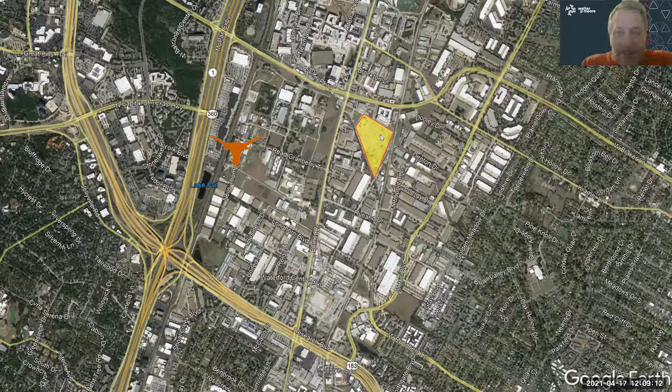So, kind of north part of Austin. If you're familiar with the Domain, it's kind of catty corner across the intersection there. There's a little tire shop on the corner where I got new tires a few years ago. So it's a kind of a strange place for a stadium, but an up and coming part of Austin here to develop.

So a little bit about the project team. Our client was Gensler. They were the architects for the project, both out of their Los Angeles office and their Austin office. We'll talk about why that is in just a minute. CAA Icon was the owner's representative. Ourselves, along with Ruben Martinez and the good folks over at Martinez Engineering, were the structural engineers. CBD and Garza were civil engineers, and then you've got all the non-civil engineers. I will say, for the students out there, get used to working with other engineers. I would say, even though clients are mostly architects for us, I spend probably more than 50% of my time working with other engineers. So kind of learning how to work with each other starting from school is a great trait and very valuable trait.

So, okay, a little bit about MLS stadiums in general. We work on a lot of stadiums, everything up to MLB and NFL stadiums. MLS is a little different. Obviously, it's kind of an up and coming league, and tend to be about in the 20 to 30,000 seat range, depending on the market.

But they tend to also be very austere buildings. The economics of these clubs is a lot different than a major league club or an NFL club that's got big TV contracts. So the budgets for these projects tend to be in the range of 100 to 350 million. Q2 Stadium is around 250. Won't say the exact number, but it's in that range. Whereas MLB, we just did Globe Life Field for the Rangers, that was about $1 billion, and NFL all the way up SoFi Stadium is north of $3 billion. So it's a little bit different mindset when you're designing for an MLS stadium.

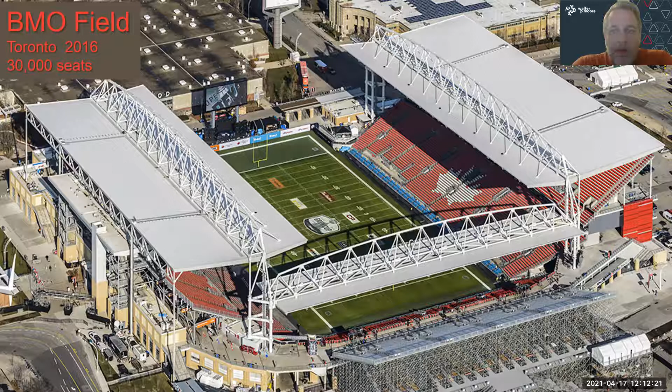Another project, this is up in Toronto. This is BMO Field. This was an existing stadium that was expanded to house the MLS club up there. We actually worked on this one for the steel contractor and doing erection engineering for the roof here. So we worked out all the crane lifts and shoring and those kinds of things to erect this roof. So they put a new covering on it and expanded the seats to accommodate this existing stadium.

Orlando City Soccer Stadium, I guess it's called Exploria Stadium now, opened in 2017, about 25,000 seats. Got a pretty decent canopy to it, but the seating is pretty straightforward, not a lot of suites or anything like that.

And with Allianz Field in St. Paul, so this is for the Minnesota United Football Club, opened in 2019, about 20,000 seats. And you start to see a little more high design come into this one. This actually has a tensile membrane skin that we helped develop the material for, that you kind of see it glowing there, wrapping the building. Shot during the daytime. These are starting to look a little bit more now like a smaller version of an NFL stadium, and they certainly spent more money on this than the prior ones that we showed you.

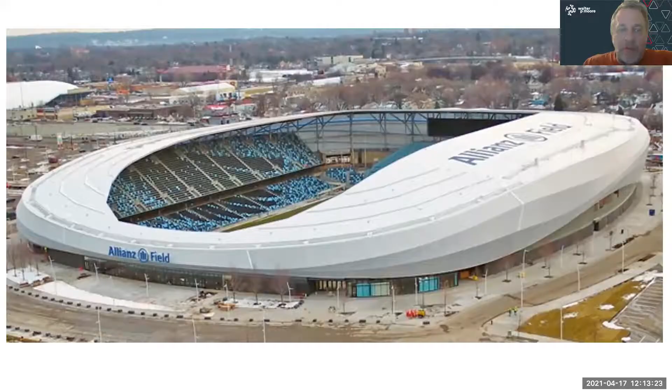Just a little bit on the section here. And you can see the material that wraps the skin there. It's a laminated PTFE mesh. So a little more high design element coming into it now.

And then this is where the Austin FC debut match later this afternoon is going to happen. This is Banc of California Stadium in Los Angeles. It's on the campus at USC. You can see downtown LA there in the background. Our office in LA is that building right there in the middle. And this was going on at the same time we were working on SoFi Stadium, kind of down the street towards LAX from this. But again, it's a little more developed now.

This has an ETFE skin around it, a fairly large ETFE roof, pretty substantial canopy.

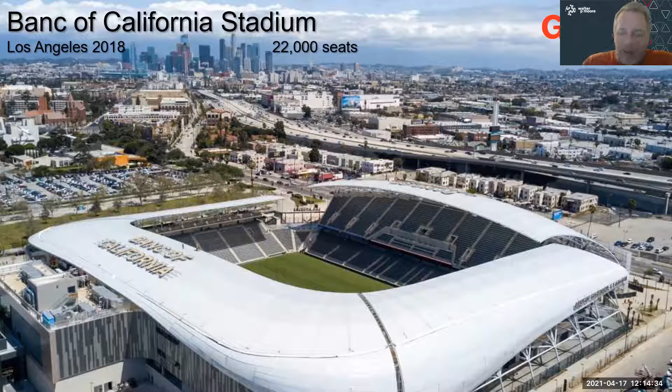We're starting to look more and more like European soccer stadiums in the design. The sports architect team over at Gensler in LA were responsible for this design, and a lot of those same folks came and worked on the Austin FC Stadium with us. So there were a lot of reference points to Banc of California Stadium, about 22,000 seats. And then this is actually a future one we're working on now.

So just a little bit there about MLS in general and how that market looks, and I'll get into Q2 Stadium more specifically now. This is an overlay on a soccer pitch of different canopy coverages for some of the projects I just showed you.

This was a huge deal for ownership here. We know in Austin, especially during the MLS season, you're playing during some of the hot months. Fan comfort was a big driver in the design of Q2 Stadium and led us to a very large canopy, the largest in MLS, and that's obviously to get shade for the fans.

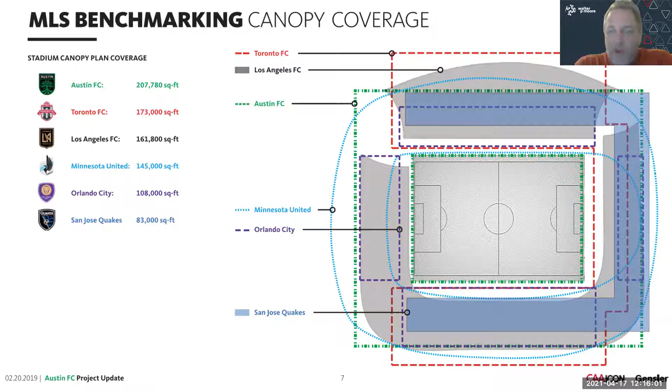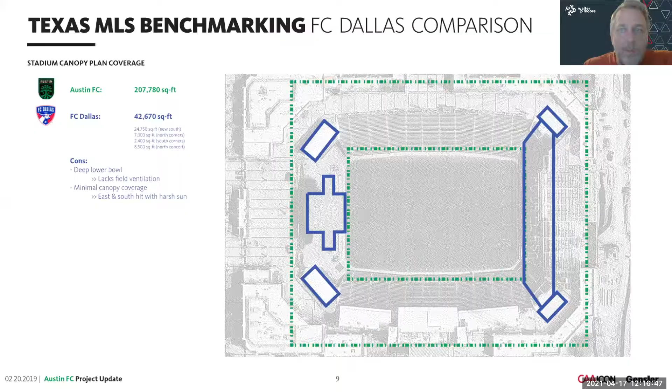Really that idea about the fan experience came from what we know about the experience up in Dallas with FC Dallas. They've got some covered seats, but by all reports, and maybe some of you have been to MLS matches up there, it's a pretty hot, sweltering experience to sit outside, especially for a day game at FC Dallas. That was something our owner was very aware of and wanted to make sure the design of Q2 Stadium considered fan comfort as the paramount consideration in coming up with the roof coverage. So you see FC Dallas, a pretty exposed condition.

This is actually an early slide in design. We changed a few things about this design, but from a coverage standpoint, this is more or less what we ended up with: about 200,000 square feet of plan coverage. You see the area there in purple is referred to as non-watertight - it doesn't have a roofing surface on it, the metal roofing is the roof surface. So the project saves a little money that way.

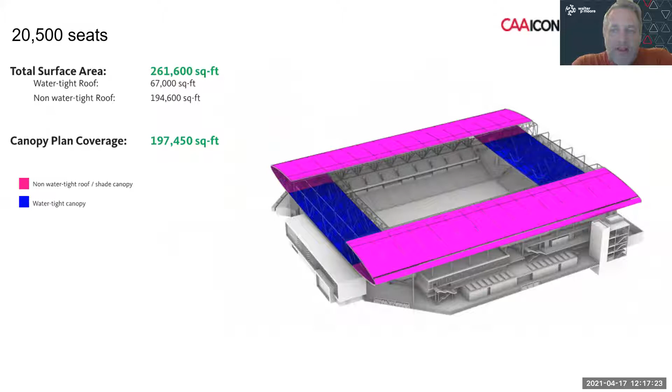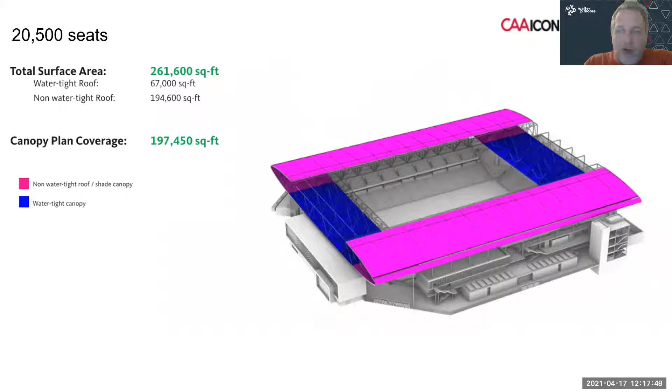Really heavy rain, it might drip a little bit, but this is primarily intended to be a shade cover canopy. Then at the two ends where the blue is, down where the roof wraps around on the north and south ends, you see there's fully waterproof roof with a roof membrane for a little more coverage over there. But primarily it's a shade canopy roof, and a very large one, as part of the distinctive design here for Q2 Stadium.

Just some shade studies - a few different options on top and bottom, but look across the top line here. This is July 1st at 1 o'clock in the afternoon. Two sides are fully in shade, the field's fully sunny.

By the time we get to 4 o'clock, this is the west side over here on the left, so it's sort of self-shading itself. A lot of the premium content is over there, so that drove decisions to put a lot of the premium stuff on the west. Obviously with the sun angle, you're getting a little bit on the lower seats here on the east side. My brother-in-law's seats are way up here in the middle on the top, so he'll be mad at me if he doesn't get shaded nicely.

And then by 7 o'clock, we've got the field in full shade, a little spotty shade coming through openings, but still quite a bit of coverage on this roof from a shade standpoint.

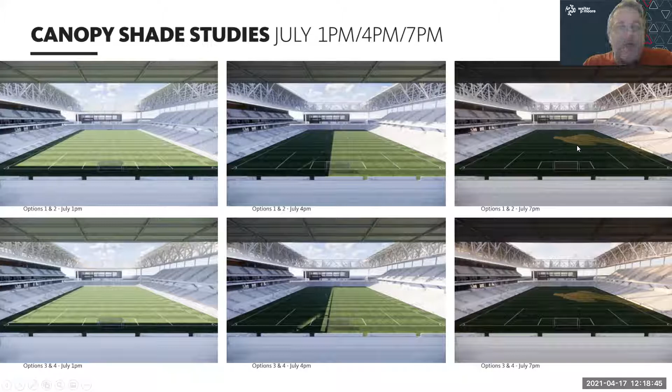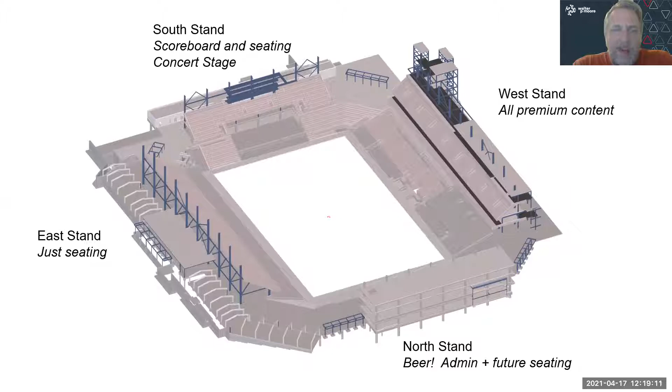All right, so with the background of the stadium in mind, this is an overview of the seating itself. Again, this is designed to be a very economical, efficient stadium. You don't see the stands wrapping all the way around like it would maybe in an NFL stadium. We've got really four distinctive stands on the four sides of the stadium.

So I'll start over here on the east stand. And the east stand is very straightforward - it's just purely seating.

There's some concourse amenities out here in the back, in low-rise, very simple buildings with restrooms and concessions and things like that. The experience over there would be very much like going to a high school football game. It's just seating over there.

As we wrap around to the south, there's a big opening here where temporary seats go, to accommodate a stage. There's a scoreboard over here on the south, an elevated concourse, and some program space in terms of support structure underneath that I'll show you in detail coming up. The south stand really represents scoreboard and stage when the building's used for concerts.

The west side is where we put all the complex stuff, all the suites, all of the premium content goes over on the west side. There's a club over there, where the higher dollar seats are. If you buy club access, that's where you are. So all the complexity really went into the west stand.

On the north stand, there's really only seats in the lower bowl on grade. There's what started out as an administration building and turned into a bit of a team store as well as a beer hall at the north end, housed in just a really conventional, very economical concrete building on that side.

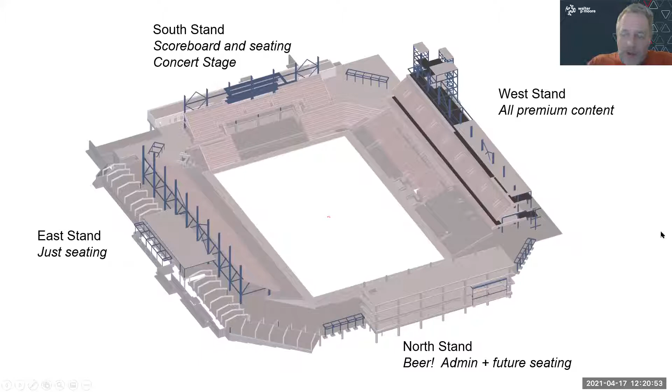Usually in stadiums, we want to enter the stadium on the main concourse, which should equate to grade. That way you can walk out and either go down to your seat if you're down low, or go up to your seat if you're up high.

Just a quick tour around the different seating sections. This is down at the north end, so we've got that sort of simple concrete building that houses the beer hall and the administration offices. You see a canopy, which I'll get to in a minute, and just seating on grade. It really couldn't get any simpler than this.

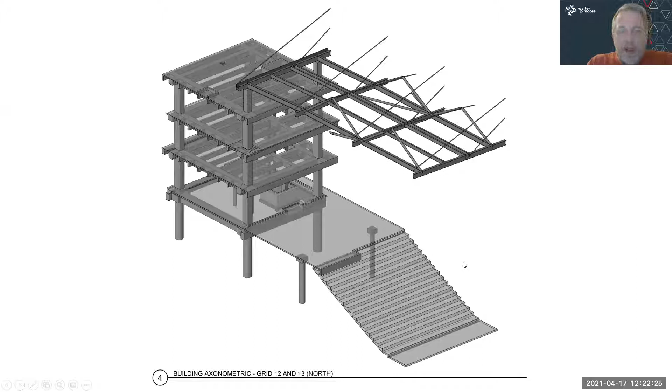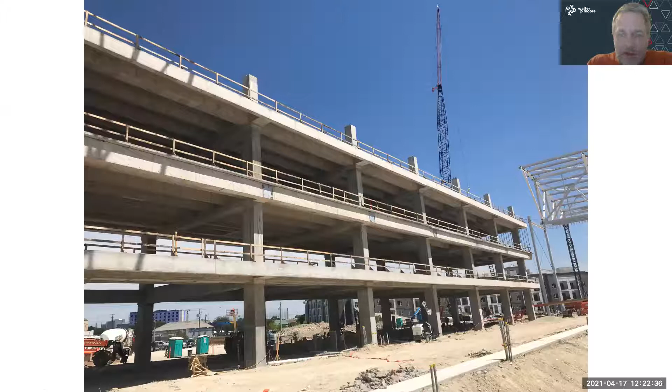Here is that building under construction. These are panform beams and a concrete moment frame system, just like you would build, say, an office building in Austin. It's pretty straightforward. And here it is completed, looking over at that north end.

Moving our way around, now we're down at the south end. This is where we house the scoreboard. There's an elevated level of concrete here, the lower bowl seating is no longer on grade. There's some steel rakers that drop in there, kind of the last thing that goes in, and then a steel structure supporting the scoreboard up here. Out back here, we've got some restrooms and concessions.

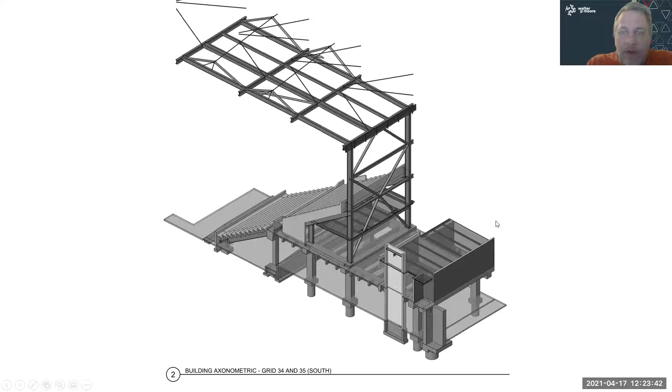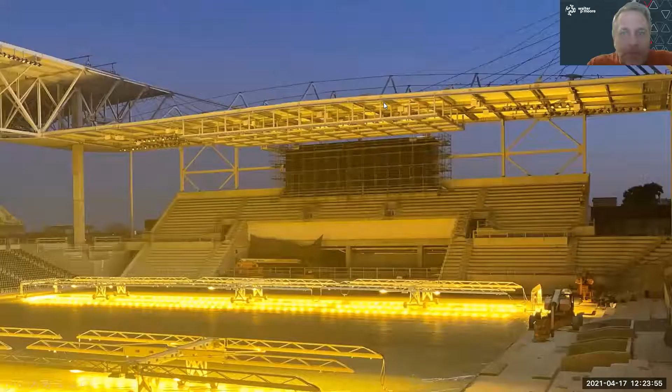Looking across at it, you see the scoreboard framing coming in here, and a big opening in the middle. Again, this is pretty simple construction. Here you see it mostly done, with them working on the scoreboard in this shot. Now you notice this big opening here in the middle.

That's intended to be able to put a stage there, and you'll see up in the roof above we've got sort of a thing hanging down from the roof. This is a rigging grid, so that the show can come in and hang the lights and speakers and whatnot from this canopy roof above. We had to accommodate about 150,000 pounds of rigging load above the stage here.

So as if Austin needed another concert venue, we've got one now up here in North Austin for a certain size show. When there's not a stage here, there's sections of temporary seats that fill in that opening. These are grow lights here, by the way. I was taking this picture one evening when they were trying to get the grass to first start growing.

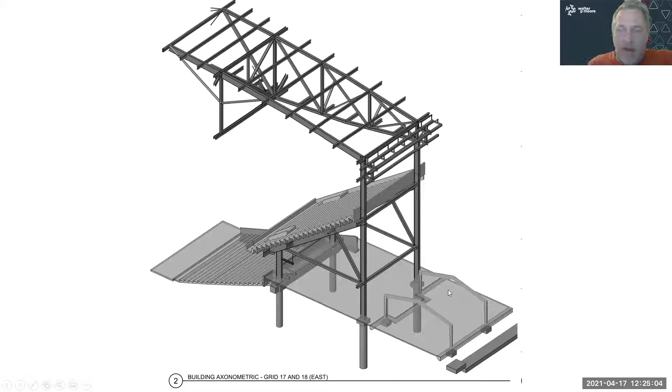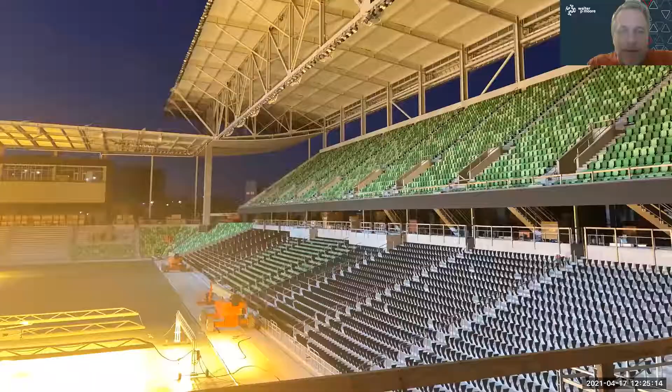All right, moving over to the east side. Again, very simple section, steel framed upper concourse, precast seating. You see the roof up above, which I'll talk about in a minute, but the lower bowl's on grade, and we've got these concession buildings out here that sort of make it nice and simple. Pretty straightforward shot during construction, looking down the east side, and here it is all complete, with nice green, or verde, seats.

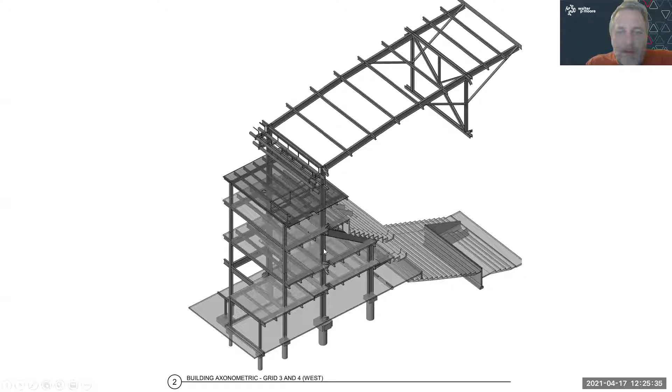And on the west side, this is where all the complexity is in the seating bowl. There's two typical sections. Part of it's on grade with a lower bowl on grade, and some premium content and club space up here. As we go further down, we actually go below grade, so we have a retention system we have to deal with, holding back the excavation on by the frame, with the same upper bowl and club spaces there.

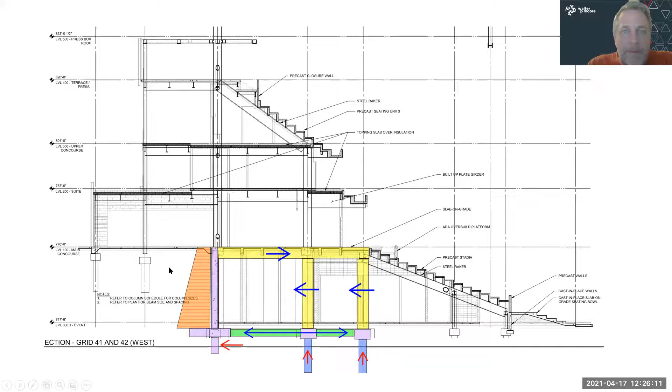All right, I'll get into the roof design now. We do a lot of roofs for big stadiums. This one was kind of a nice in-between size for us. We could try out a few different things.

Basic structural system here sits on 4 big concrete columns. These are 5 foot square all the way up, and we've got a span of 430 feet in the long direction and 312 feet in the short direction to fill in the roof.

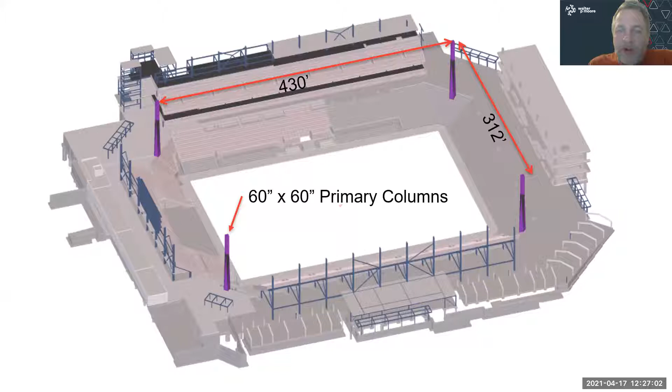This gives you a sense of the system. So this is one of those big concrete columns in the corners we saw there. And then spanning between those concrete columns, spanning the long direction, we've got a 32-foot deep primary truss. This is made up of W14 sections turned sort of horizontal, which makes them nice and easy to connect.

And then spanning from that truss over to the back of the bowl, we have columns coming up on every grid line at the back of the bowl. We've got a W36 girder that does that. That's about an 85-foot span that it's got to deal with, and it's nice light roof loads. We can make that work all day long.

That girder is braced by some W18 purlins that are what we would call torsionally connected, torsionally bracing the big roof girders there. And then coming out towards the field, we've got an extension of those roof girders that's propped up with some braces. This sort of further shades the field and kind of balances the section on the big truss, gives us better coverage. On the next slide, I'll talk about this corner, which is kind of complicated.

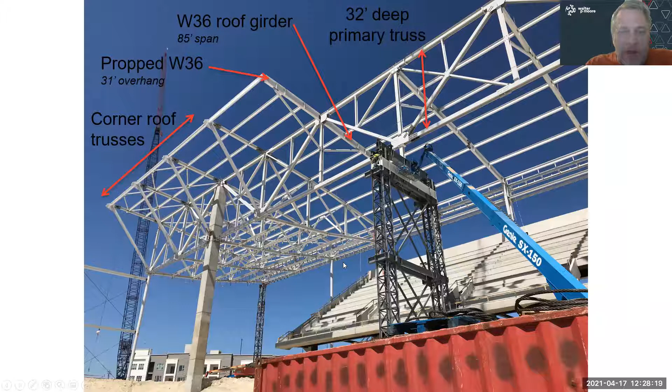Same thing in the other direction. We have an outrigger column here and a column here. So this is actually sort of a series of full depth two-way trusses. This starts out at the same 32-foot depth out here, tapers down to shallow depth at the perimeter. These kind of cantilever out this way, but they also cantilever out this way to float that corner.

We just put a temporary shore in that corner as we were erecting it to hold it up. And then when it's all done, we take that shore out, or actually it lifts off of it. I'll show you that in a little bit.

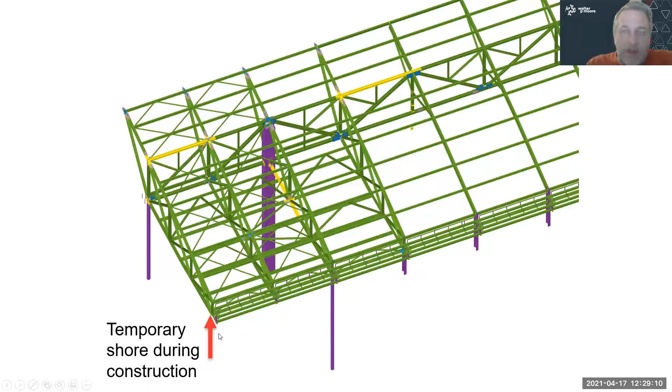A little bit about the roof lateral system. If our concrete columns were doing all of the work, say for wind loads, they would be purely cantilevered out of the ground. They'd have to be a lot bigger than that 5 foot by 5 foot.

But what we're doing is basically making a moment frame with these outrigger columns below. Think of it like a big portal frame, but the big overturning moments get distributed as couples out here at the end and to the concrete column. So the column, effectively that bending arm between those two forces is doing the work instead of that concrete column section having to do all the work. It just has to take the shear between here and here and some localized bending, so we can keep it fairly slender for the size that we are here.

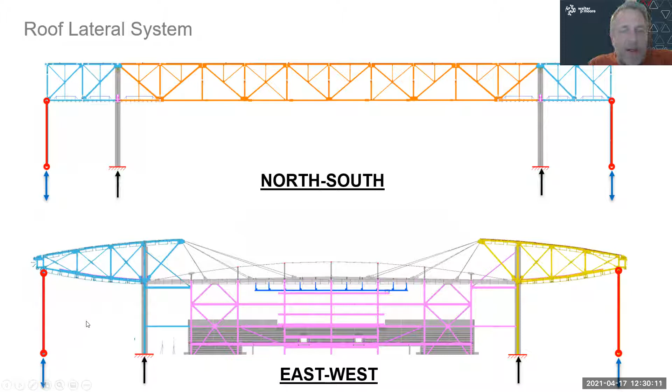And the same thing happens in the east-west direction. Effectively with this east-west section, we get some moment continuity that way, and we've got this outrigger effect, which keeps things nice and stiff. We supplement that with every column line along the back of the bowl being a kind of chunky vertical beam, not so much a column, but cantilevering up and bracing the roof horizontally at each grid along the back of the bowl. That's what's happening along the sidelines.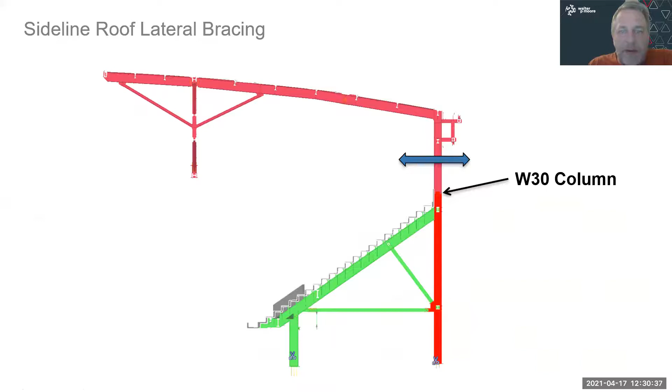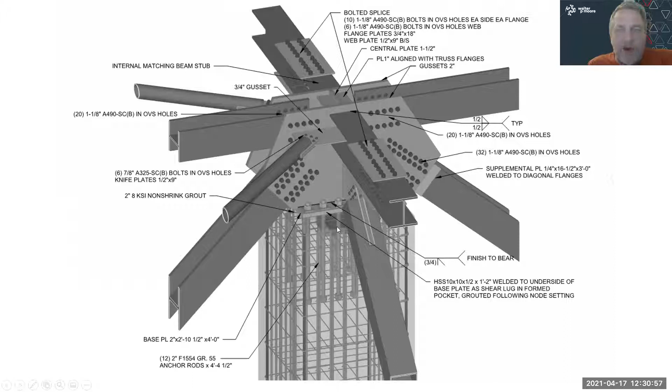Just a few connections. A lot of times now we're fully modeling all these connections in Tekla as we do the design. This shows the way that the main trusses sit on top of the big 5-foot concrete columns with the rebar, making sure the anchor rods aren't hitting any rebar, that this is all constructible. This went pretty smooth for us.

And this is where those big trusses, the bottom chord of those big trusses, cross the column. We spent a lot of time going back and forth with the contractor on this. They actually built a mock-up of this thing, but it's not too hard. There's compression, pretty large compression going through the column, but no tension. So we've got some bearing plates that bear on the face of the column. We just need to provide quite a bit of adjustment to account for the concrete tolerances in a situation like this.

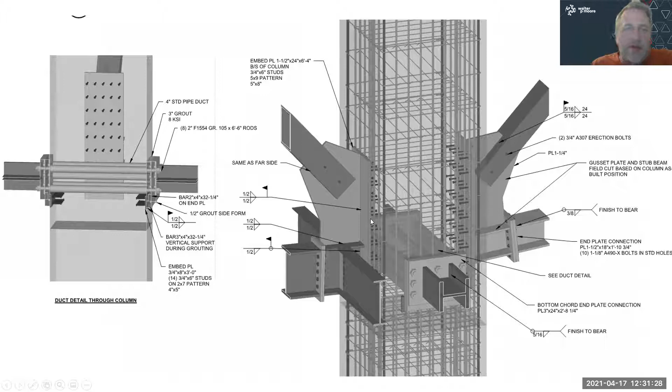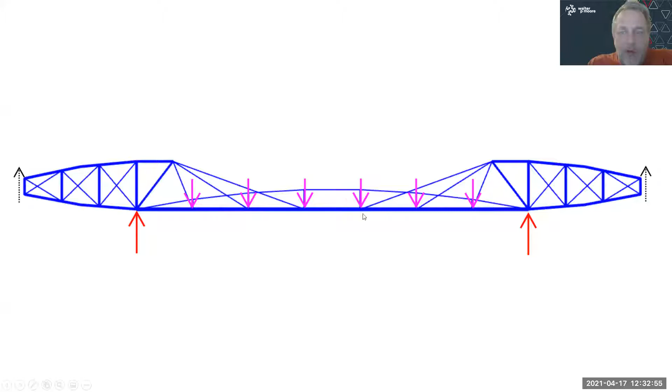I'll show you on the next slide. This is sort of a force diagram. So we've got our downward load here in the middle of the roof. These stay cables going down to these points are picking up the downward load, which is great. But we've still got wind uplift. If that were the only system, we'll get wind uplift, which a lot of times in these roofs exceeds the weight of the roof. It would just flutter upwards uncontrolled. So we have to have a way to hold it down for wind uplift. You'll see there's a bowstring cable that we've added. It's kind of superimposed on the system that provides the uplift resistance working with the downward cables. It also gives us a way to pre-stress the system against each other.

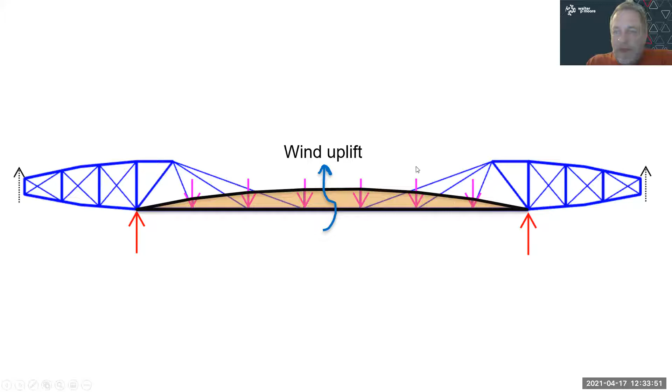The other nice thing with this downward load, you can see we kind of balance the section on these super columns over here. And actually what happens is this freestanding corner that I showed you actually lifts up a little bit because we're balancing it with the weight in the middle here. We can keep this edge floating in a really nice way just by letting gravity work for us on this little teeter-totter here.

So I mentioned that we literally built it like a bridge. First thing that happened, we pre-assembled these panels on the ground, and they're about 40 feet square. Lifted them up with a crane. The crane would hold it there while they hook up the cable. They held the side that the cable goes on just a little bit high, so you could pin the cable with the cable slack, let the load off the crane, and the weight of the panel itself tensions the cable, which worked really nicely. That's the first panel.

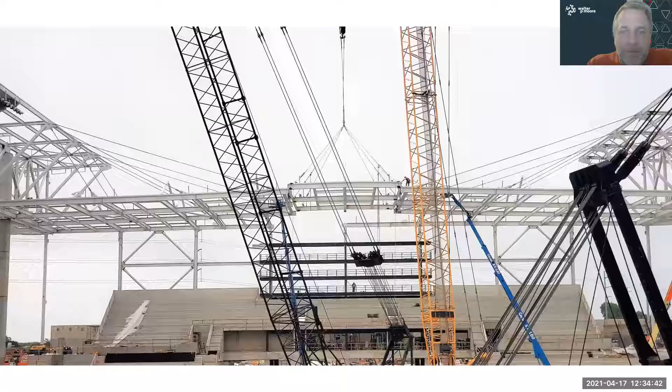Here you see the next panel having been lifted up, and they're fitting it onto the first one. A fairly complicated pick here, holding it in a certain position while they attach the permanent cables so they can let it go from the crane. You do that from both sides. We're cantilevered out to our third cable left and right, and on a day when the temperature was some magic temperature, this fit perfectly. They could just drop the center section in, connect it up, and we were done.

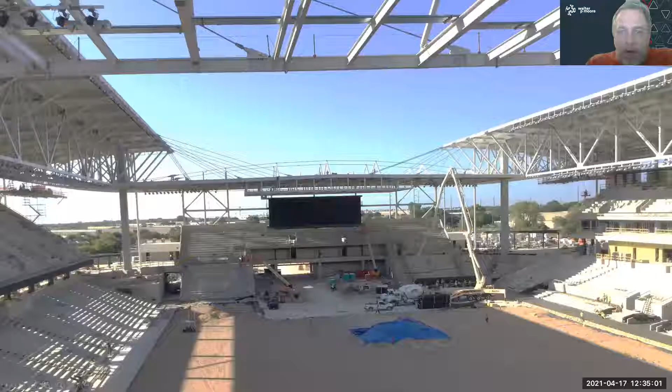After those downward cables were in place, they came in and strung this uplift cable that you see going across here. It sits on some struts that extend up to clamps. Then we had to tension these cables with some hydraulics to get the right pretension in the uplift cables.

All of these cables are what's called full locked coil cables. They've got these Z-shaped outer wires protected with a nice Galfan coating. Every cable here is the same size - they're all 60 millimeters in diameter, with about an 800 kip breaking load.

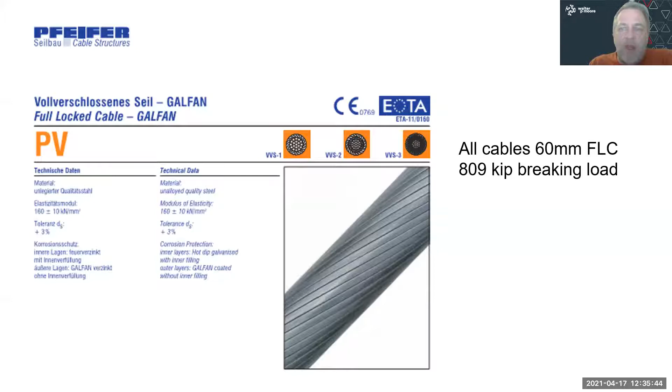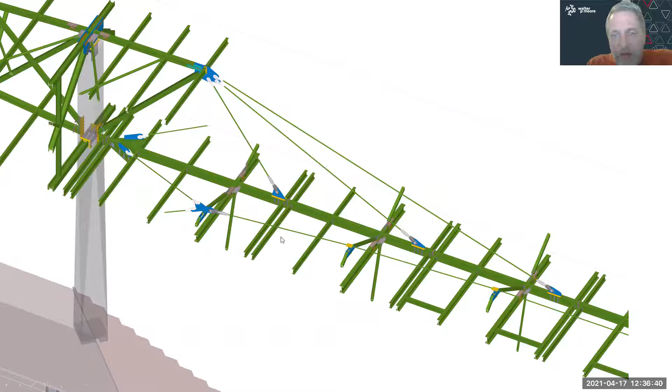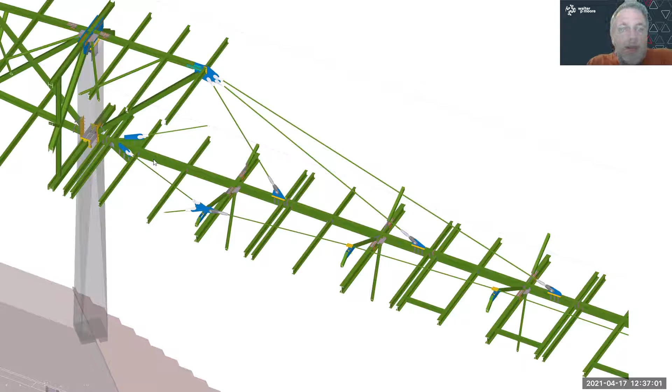A little better shot of maybe the cable system here. You see the 3-stay cables coming down. We've got adjustable sockets on the bottom end, so we can adjust for any tolerance in the steel. Then you've got the uplift cable system here - you see it kind of offset. We couldn't have that uplift cable in the same location, it would just hit the other cable. So we put it halfway in between on these V-shaped struts that come up and support the cable. It comes along, and then at the end it splays out with 2 cables to resolve the load back as kind of a compression in this girder running east-west. That's how the uplift cable system works.

Just a little bit about the people involved in the construction. The construction manager here was Austin Commercial - those guys did a great job building this thing in a really short amount of time. Most of our work on the steel side was with Irwin Steel out of the Dallas area, and then Bosworth Steel Erectors, who we do quite a bit of work with. On the consultant side, a company called MXC Consulting, which is our construction engineering arm, worked for the contractor doing various modeling and erection engineering tasks. There's a company called DBM Vercon BDS, who were the steel detailers, and the east and west roofs erection engineering was done by Stan Lindsay, working for Bosworth. And then we did the erection engineering on the cable pieces.

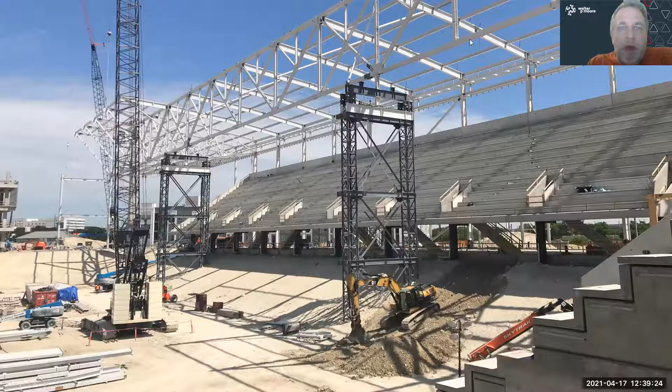This section was all assembled on the ground, lifted up by a crane, set on the shore tower, and braced by these W36 girders to hold it there.

Once the roof was done, this was taken on the day we were deshoring the east side. You come in here, and there's a header with some hydraulics up here. You're able to lower this header to take the load off the shore tower and let the truss span. It's always a big day when you deshore one of these trusses, and you can see it's working like it should, deflecting like you expect.

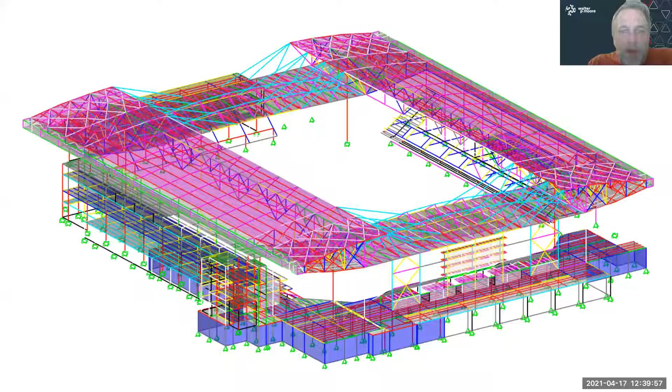This is our computer analysis model for the project, built in the SAP 2000 software. We spend a lot of time with these models. This one has quite a few stage construction features where we actually build the structure step by step, the way it was built in real life, because there are sequence effects that get locked into these roofs that are pretty important. There's a bunch of wind loads in here too, and this is what we use to really drive a lot of our design process.

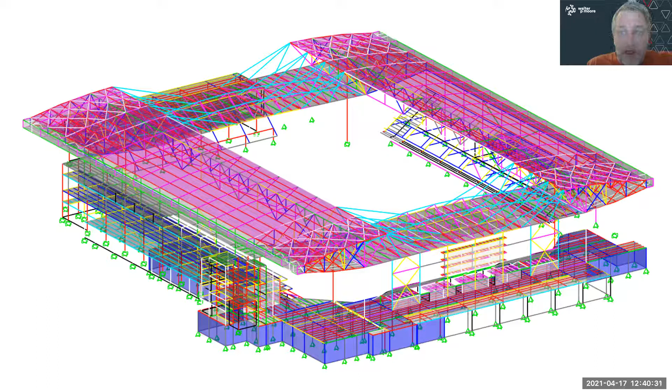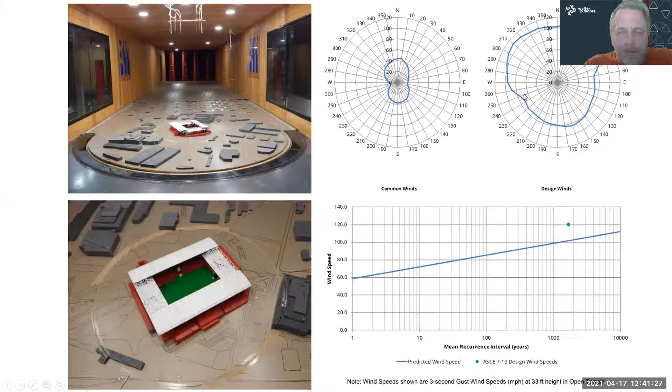A little bit on the construction. This was probably one of the fastest projects we have ever designed. To make that possible, one of the things we did, supplemental to our normal services, was build a...

The schedule here was so fast that we were working on this model before a fabricator was even selected. Once they were selected, we had about 2 weeks to give them the first sequences in the model, so they could extract and get to fabrication almost immediately. That's a process that usually takes several months from finish of design to start of fabrication. There's a lot of things we're doing in the steel market these days to make these projects go extremely fast.

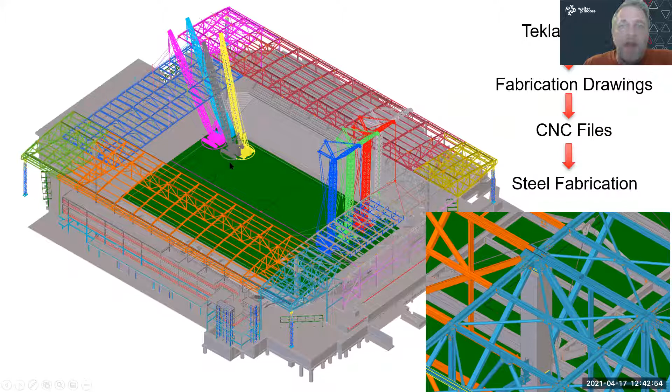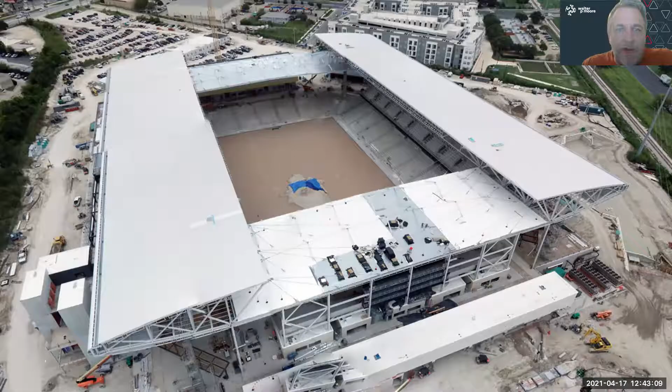So here it is, almost all done, just putting the last bit of roofing on. Someone took a drone up and took this picture, so you see it from above. This was a little bit later, taken from the inside, working on the field and the last few seats. But this is pretty well how the interior fan experience will be in the stadium. Turned out pretty nice, I think.

So with that, I'll kind of wrap up. I think we got a little time for questions.

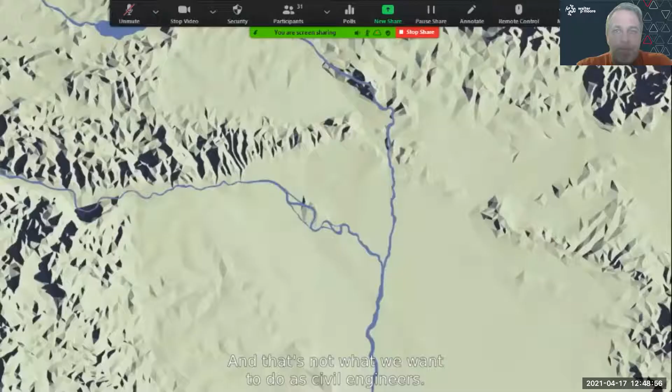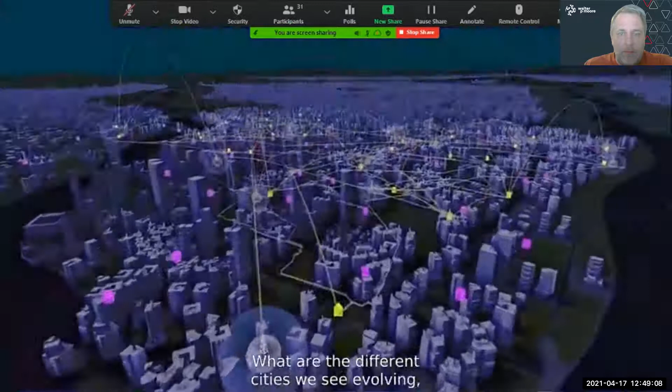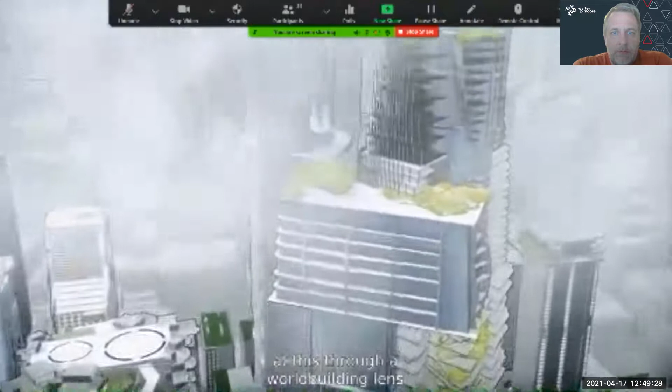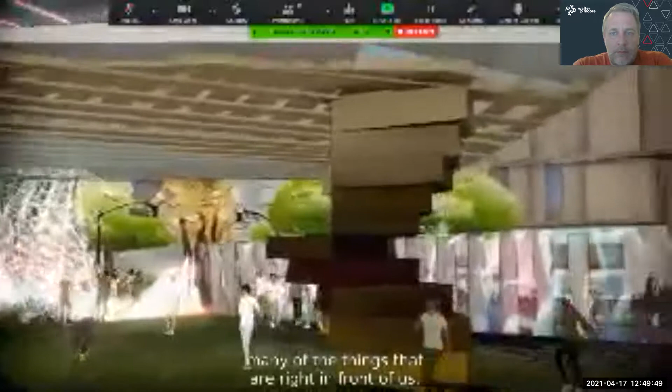If you don't make a plan or make a goal and have a vision, then you just react your way into the future. And that's not what we want to do as civil engineers - we want to lead into the future. How we do our jobs as civil engineers, maybe as systems engineers, will be different in the future. What are the different cities we see evolving, and how can we really get an understanding of those cities? How can we immerse ourselves in those cities today? What are the different social and physical infrastructures that can be created in which we can all come together and thrive? What's really important about looking at this through a world-building lens is that it's designed to look forward and then thread back into the present. The further out you look, the more it changes our view of the present. We're forced to not only reimagine our communities, but to rediscover our neighbors, to rediscover many of the things that are right in front of us. We're spatializing narrative and allowing the user to tell their own story as they navigate the experience of this virtual cityscape. What can a megacity grow toward so that it's serving a better purpose? You start looking at individual buildings then, because you can typically shape a building.

Can you connect several buildings together? The buildings might form coalitions and interact with the utility, and the utility will interact with the providers of energy all around. That becomes a transactive energy system, and the buildings can play an active role. I can design a microgrid that serves that district, or if we need the microgrid to serve an adjacent district, we layer those together.

We need a water supply system that can meet 15 million people's needs. Every building in the future should be capturing sunlight and rainwater, and every building should be recycling its own waste. Ideally, the life cycle of infrastructure is continuous, or perhaps reused in the future without going back and re-emitting all that carbon to do the same thing over again. That's the way we've built over the last century, and we simply cannot do it anymore.

Buildings are not unlike a human body. They have bones and skin. They consume energy and regulate temperature and generate waste. What if architects use genetic tools from synthetic biology to encode the architecture of buildings right into the DNA of organisms? The facades now become active components, and one active thing that facades can do is breathe or sweat. You can infuse biological functionalities into structural building materials.

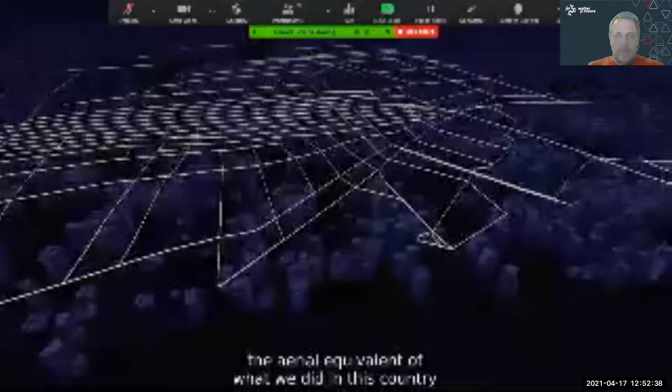You might have 175 drones coming in at 11:45 a.m. delivering lunch. Where do they land? How much space is between them? What are the specifications? It just has to be designed in a way that people can interact, making sure that you're encouraging paths of travel that are spontaneous. We're at just the right point in time to get together and build basically the aerial equivalent of what we did in this country with the national interstate highway system, and no longer be restricted to 2 dimensions.

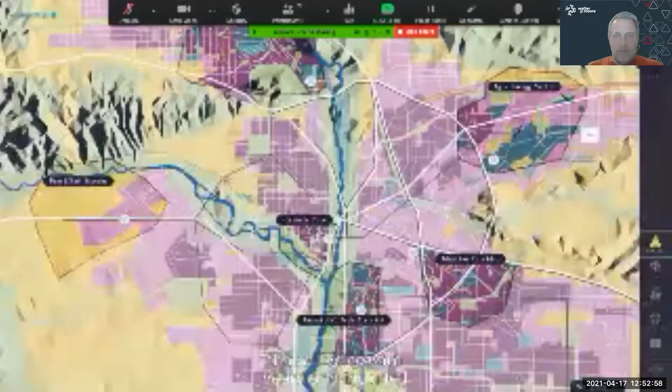How do you get the public involved in civil engineering, in the process of civil engineering? One of the best ways that we can make sure that all voices are heard and included is to start with the people who are doing the planning and developing and see what their teams look like. How can you ensure social equity and social justice and get input from the community for the projects we're working on? We are very conscious about the demographic, the diversity of the community and the society, and make sure that we don't leave anybody behind.

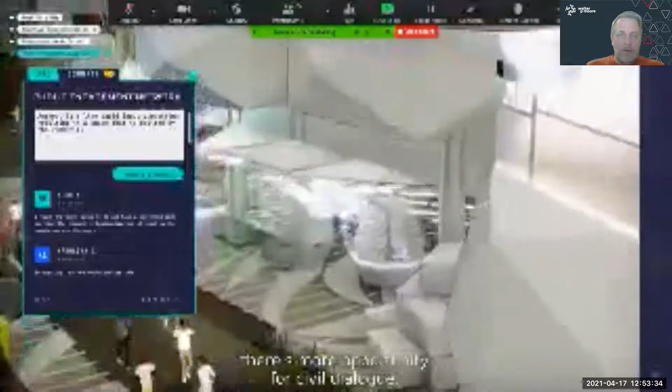Creating these multi-use spaces is one way of bringing people together. Once they're in the same shared space, there is more opportunity for connection, more opportunity for shared experience, more opportunity for civil dialogue. The best solutions on Earth come with diversity of thought.

What I love most about the Future World Vision Project is that we can think about it together, we can have this dialogue. Users will encounter one another and have conversations across disciplines that will begin to feed back and bring new information into the system. We're trying to build a world and a machine that creates absolute engagement of the user and of the engineer in their own future.

The Future World Vision is really at the core of what we're trying to do at ASCE in transforming the idea of what a civil engineer can be. That's how we think we can advance the profession of civil engineering and attract the best and brightest. This 4th Industrial Revolution, married to the fundamentals of concrete, glass, and steel, is this incredible toolbox for society. It's really on us as civil engineers to pull that all together.

Thank you. Such an inspirational video for civil engineers and how we can shape our future.